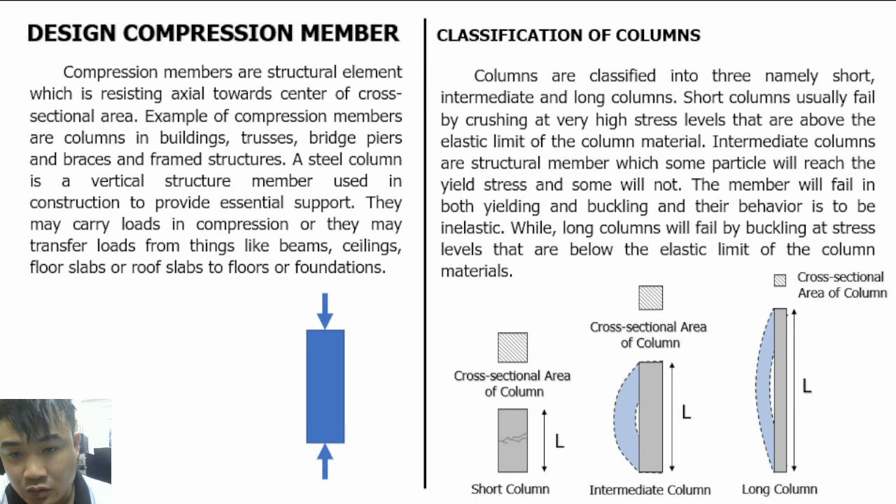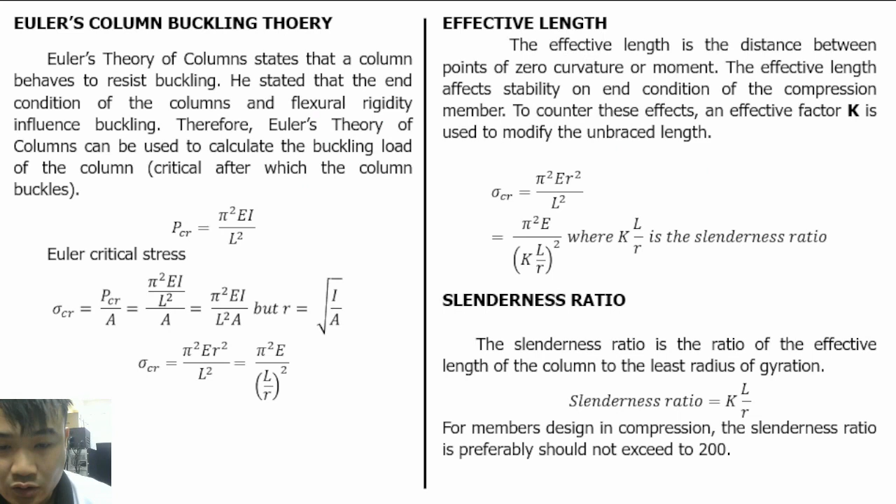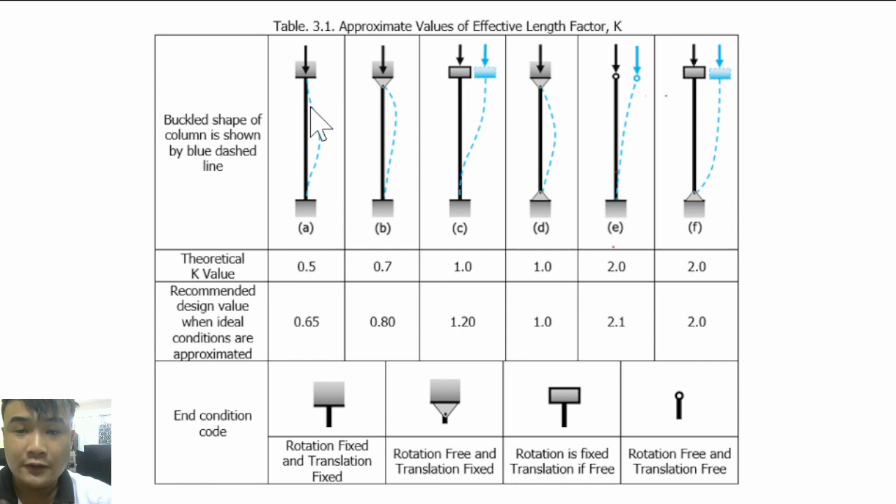So, theoretical K value. So, bakit 0.5? Yung 0.5 dyan, dahil sabi natin kanina, yung effective length natin is the distance between the points of zero curvature or the moment. So, pagdating dito, dahil fixed support siya dito, 0.5 lang yung distance ng length na nagbabuckle. Pagdating naman dito, nasa 0.7 yung length na nagbuckle. Pagdating dito sa C, nasa 1, the whole length niya ay nagbabuckle.

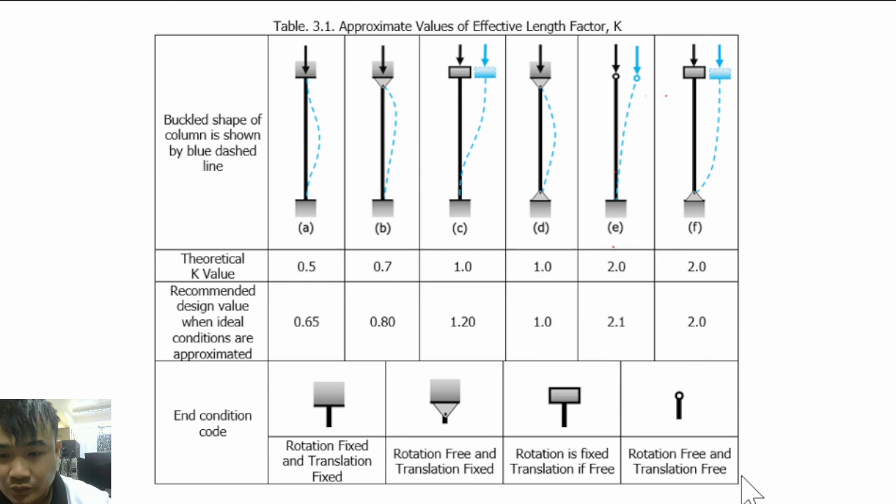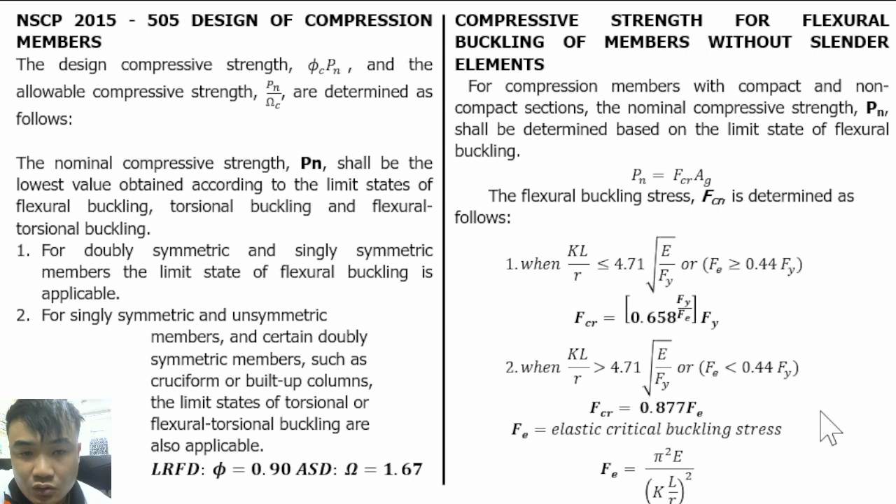Meron tayo ditong built-up column in the figure below. Consists of 2 C375 by 75 welded to a plate 400 mm by 12 mm. The column is 4.5 meters long, and is hinged at both ends. Determine the LRFD design strength and the ASD allowable strength if the column is axially loaded. Use Fy equal to 345 MPa.

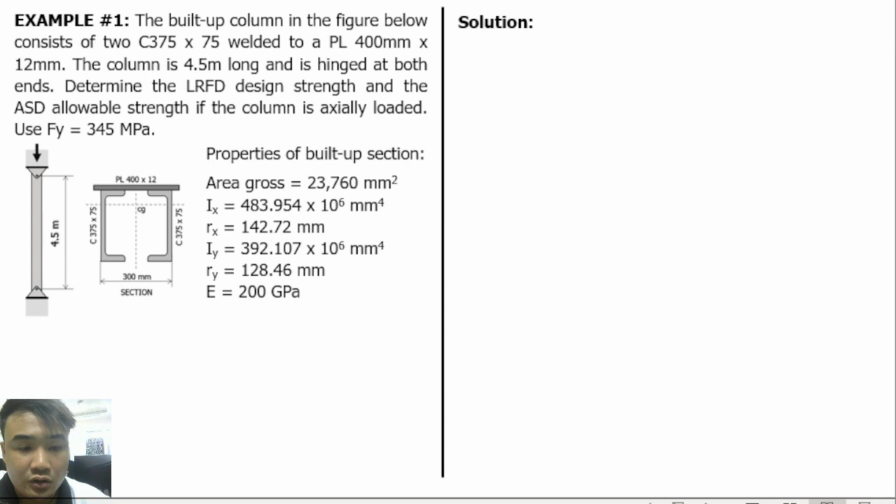Properties: area gross 23,760 square millimeters. Moment of inertia with respect to x is 483.954. Radius of gyration with respect to x is 142.72 mm. Moment of inertia with respect to y is 392.107. Radius of gyration with respect to y is 128.46 mm. Modulus of elasticity equal to 200 GPa. So solution, we need to determine first yung effective length K factor.

And effective length factor K is equal to 1.0 based on table type D. So check na natin type D. Ayan, so hinge siya parehas. So theoretical K value is equal to 1.0. So balik tayo dito. So K natin is equal to 1.0. And solving for slenderness ratio for both axes, sa X is equal to 1.0, length is 4.5, then Rx is 142.72 mm, is equal to 31.53.

Then slenderness ratio naman pagdating sa Y, 1.0 multiplied by length niya, 4.5 pa rin. Then yung kanyang radius of gyration with respect to Y is 128.46, is equal to 35.03. So based on two values, mas mataas yung value na si 35.03. So, bakit mas mataas sa value? Pag mas mataas yung slenderness ratio, mas critical yung column. Kaya mas mainam na gamitin natin yung malaking value.

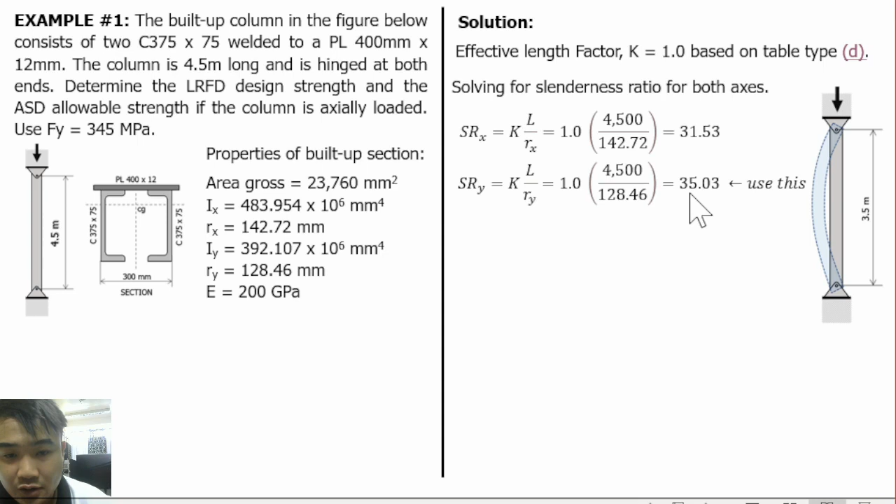So, check the condition requirement by the code. First condition, yung slenderness ratio, kailangan less than siya doon sa 4.71 square root of E over Fy, or Fe is greater than 0.44 Fy. So, check muna natin yung slenderness ratio. Ito yung slenderness ratio natin. Solve natin itong 4.71. So, dito, ito yung formula niya, 4.71.

Ang ating E is equal to 200 GPa. So, we need to convert it in MPa so that pwede natin i-divide dito sa 345. So, ang value niya is 113.403, unitless. So, compare it dun sa value ng slenderness ratio dito. 35 lang, mas malaki si 113 compared kay 35. So, therefore, yung first condition ay satisfied.

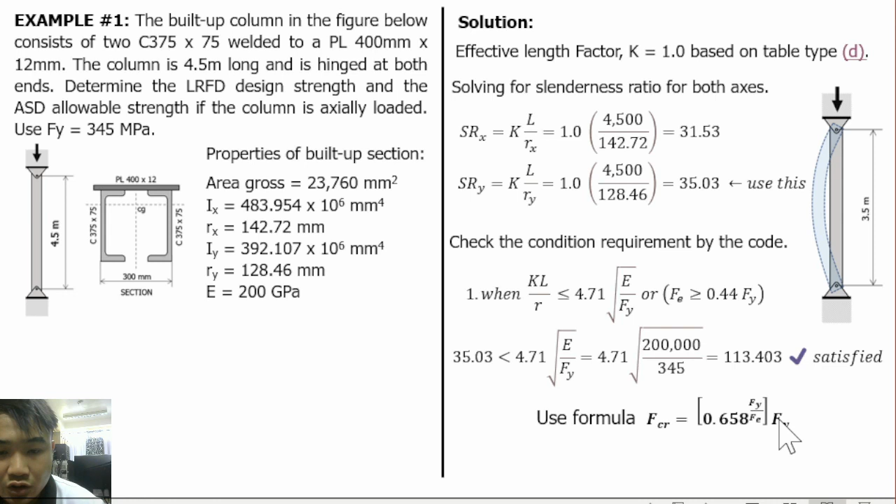So, we can use the formula FCR is equal to 0.658 raised to Fy over Fe, multiplied by Fy. So, let's try to use this formula. Substitute natin. Fe is equal to pi squared E divided by slenderness ratio squared. Yung slenderness ratio na nakuha natin is 35.03. Then yung E is 200 GPa. So, we have the value of Fe equal to 1608.6 MPa. Substitute natin to sa formula ng FCR.

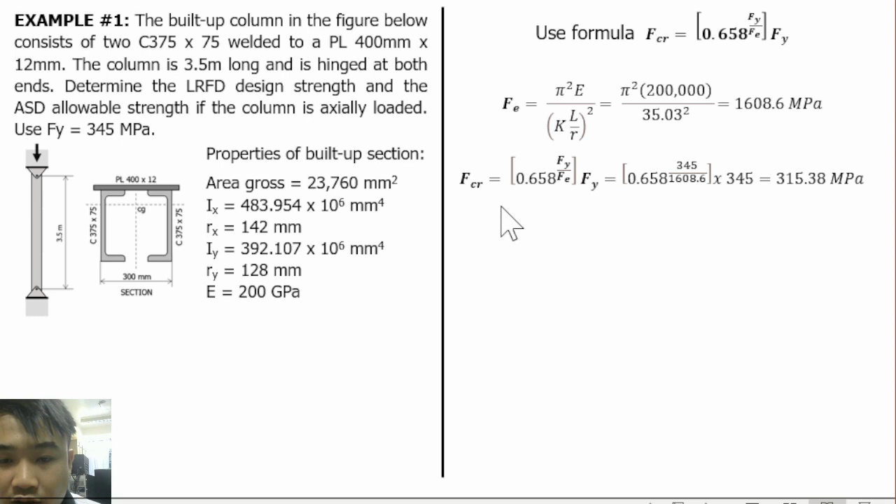So, ayan, multiplied by 345. So, we have the value of FCR equal to 315.38 MPa. Pero hindi pa yan yung ating strength. Kasi yung stress pa lang, critical stress. So, we need to determine the design strength. We need to solve for nominal capacity PN. FCR is equal to PN over A. So, we need to equate it sa PN.

PN is equal to FCR multiplied by AG. Yung FCR natin kanina is 315 multiplied by AG. Ito yung AG natin, 23,760. Then, we need to convert it in kilonewton, since ang ma-compute natin dito is in Newton kasi itong MPa is equal to Newton per millimeter squared. Then yung ating area is millimeter squared. So, therefore, yung value dito is Newton. So, 1 kilonewton is equivalent to 1,000 Newton. So, we have 7,493.428 kilonewton.

So, we need to solve it for LRFD. Phi is equal to 0.9. PU max is equal to phi PN. So, multiply lang natin ng phi, 0.9. Then, we have 7,644.085 kilonewton. So, this is our answer for LRFD design strength.